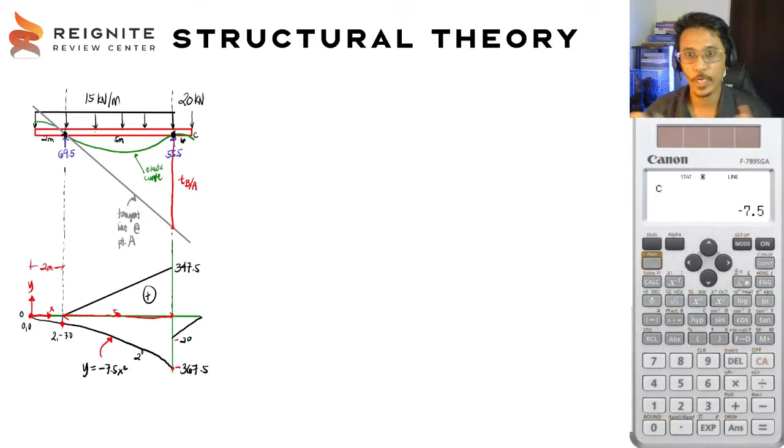And then punta kayo sa, mali, wait lang. Hindi pala na-enter. Then punta kayo dito sa reg. So apps, then punta kayo sa 8. Ito na yung mga sinulat ko kanina. So kung titingnan nyo dito, yung A natin ay 0. And then yung B natin ay 0 din. And then yung ating C ay -7.5. Okay? So yun na yung ating mga values dun sa kanina. So pwede ang calculator.

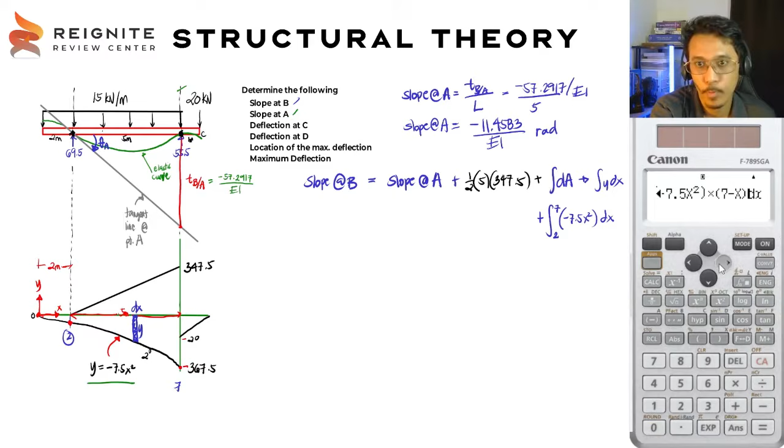So dito, buburahin ko lang to guys. So dito makukuha nyo yung area natin which is equal to negative 837.5. So ibig sabihin yung slope at B natin ay equal sa negative 11.4583 over EI. Then add natin itong area na to.

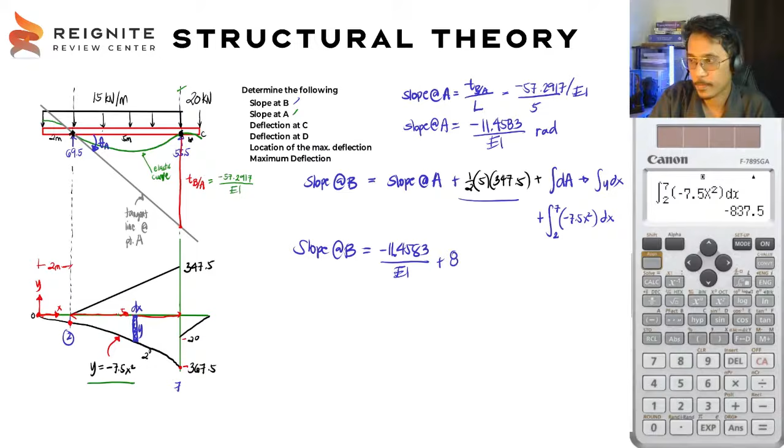So 0.5 times 5 times 347.5, so you have 868.75. Then add natin tong isa, yung in-integrate natin, negative 837.5. So makukuha natin dito yung slope at B: 19.7917 over EI. And now it's positive kasi evident na counterclockwise yung slope niya dito sa point B.